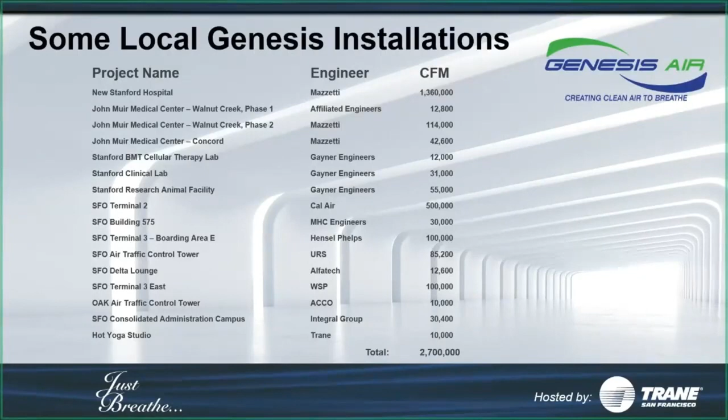First off, you want to be sure that you're not the first one to use a product. This is just a partial list of some local installations in the Bay Area. And as you can see, a lot of them center around hospitals and airports. So you will not be the first if you put them in. There are people you can talk to, and we've had a really good track record in your sales area.

So let's look at the challenge right now. The challenge is in enclosed public spaces or even private homes, medical, schools, offices, retail, your home, government. How are you going to deal with that little creature in the upper right-hand corner called COVID-19? There are some limitations with legacy technologies. Many of you, your challenge is going to be retrofitting existing systems, and CenterPoint PCO is a really easy solution. We'll go over the reasons for that.

But it's hard to use legacy technologies at times because of static pressure drop and particular challenges with the type of contaminant. With a contaminant that's no bigger than 0.06 microns, according to the New England Journal of Medicine, this COVID-19 virion is not very big, 0.06 to 0.14 microns. So filtration, while it's been the answer in the past, may not be the answer in the future. And then you, of course, have the limitations associated with static pressure drop.

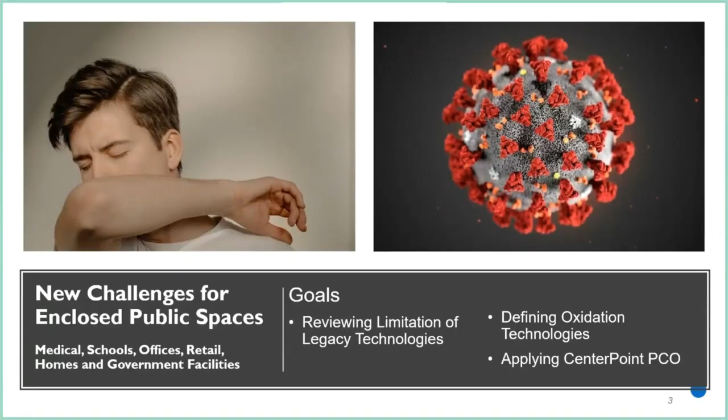So one of the ways that we have tried to overcome some of the challenges is by the use of oxidative technologies. We're going to talk about oxidative technologies today, how they work, and specifically how CenterPoint PCO works. Let's look at the problem itself. This is a short video. It doesn't have sound, but it shows a person sneezing.

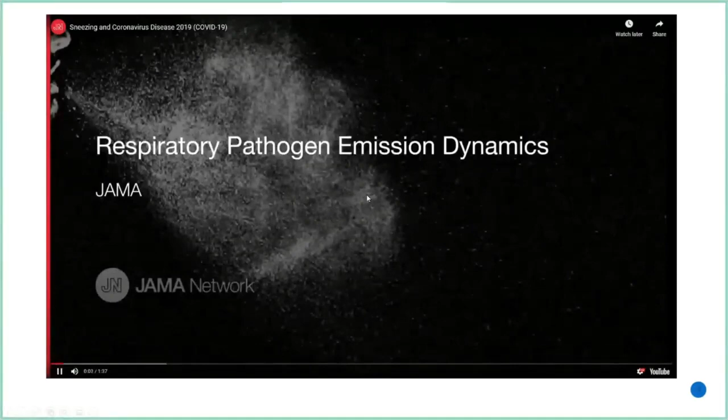And when the person sneezes, we can see a variety of droplet sizes here. The ones that we're most concerned about are not the ones that are falling straight to the surface within 20 inches or the medium range that are falling even further out. The ones we're concerned with are the ones that remain in the form of a cloud. Let's see if I can move this up here. You can see the cloud starting to form of the little bitty droplets.

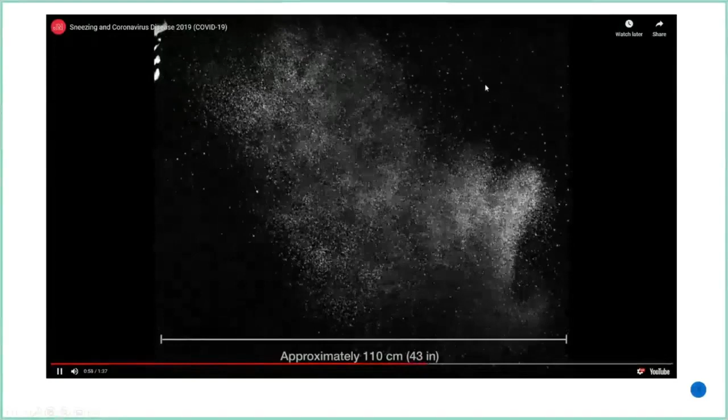That is a droplet nuclei. And as we see that thing form, you can see how it just sits in the air. Droplet nuclei are less than 5 micron, and they can stay in the air for up to 3 hours. One of the things that we need to be aware of is that the droplet nuclei has its own challenge. It can move through your buildings using your air conditioning systems.

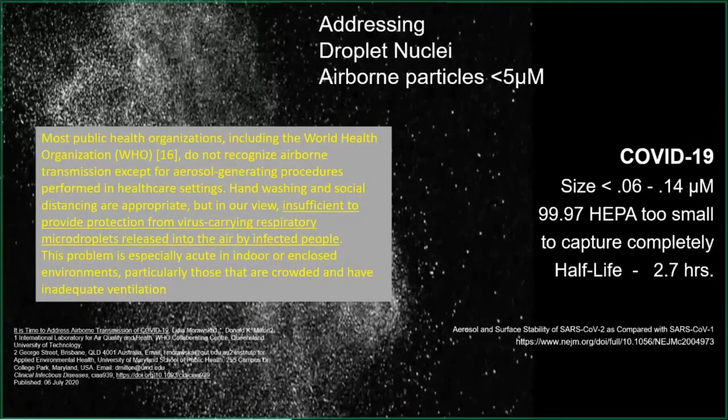It can, of course, move person to person, but we have a challenge now that may not have been fully addressed by the World Health Organization or the CDC. Last week, a paper was published and signed by 239 healthcare and public health officials that said, really, with this particular virus, we do not have sufficient safeguards in place to deal with the airborne component. So what we're talking about today is how you deal with airborne particles, i.e. droplet nuclei, that are less than 5 microns.

Again, we'll review. The size of COVID-19 is 0.06 to 0.14. That's according to the New England Journal of Medicine. Some of this can even go through a medical grade HEPA, but many of you have applications where it's not practical to even put a medical grade HEPA. And the half-life on this particular virus is 2.7 hours in the air.

So if it gets in the air and it can stay in the air in the form of a droplet nuclei, and it can move through your building using your HVAC systems, how are you going to deal with this particular problem when we have a virus where, as far as I've been able to read, we don't even know exactly the minimum infectious dosage? But it's going to be small, because that's typical with viruses. It doesn't take as many as it does bacteria or mold.

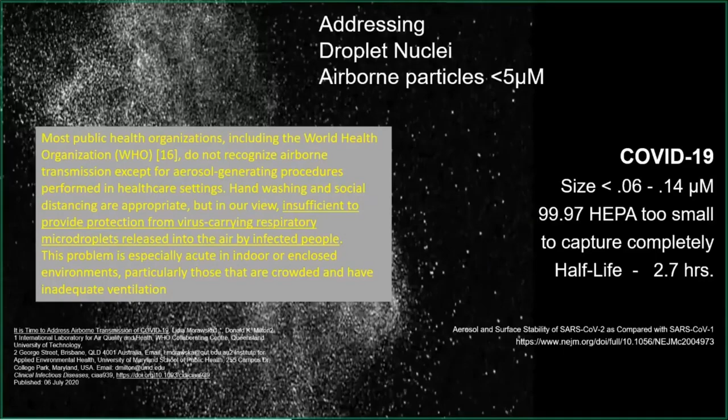So what's our solution? CenterPoint PCO panels are something for you to consider. Photocatalytic oxidation, or PCO, has been on the market for about 20 years, but all designs are not the same. And we're going to look at a couple of different methods of building a PCO. But one of the things to be aware of is in the past, PCO designs led to the production of things like aldehydes, or they put out ozone. There were some real limitations, and they didn't have good first pass efficacy, and that was simply due to the design.

CenterPoint PCO has dealt with some of the issues that in the past were a problem with PCO. Simply by placing the energy inside the panel, it irradiates the complete panel, and using a 6-inch pleated matrix, it gives a lot of surface area for the reaction that must take place. But here are the things about CenterPoint PCO. It's a 6-inch TiO2 coated mesh. It uses a proprietary titanium. The design has been patented because it has really good energy distribution and it has a lot of residence time. So some of the problems in the past have been designed away.

So the products sold by San Francisco Trane, whether it's a retrofit Genesis, or in Trane air handlers, Trane catalytic air cleaners, all take advantage of this unique CenterPoint design. It's been tested. We have third-party tests we'll talk about at the end. Been proven in the field. We've been out in the field now for 18 years. It works. The problem in the past is it was value engineered out of a number of jobs. Some of you may have been involved in jobs that had CenterPoint PCO, but it was value engineered out.

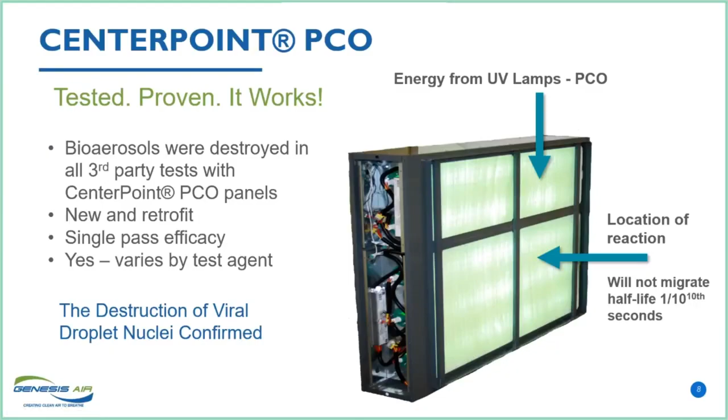So what's the product? It's just a little panel. It looks like a very poorly pleated filter with a light running through the middle, but you can see from the close-up that's not a filter. The reason that it won't pleat is because that fiberglass mesh has enough tensile strength to stand upright in an airstream. And so when you coat it, it doesn't pleat really pretty, but it gives us a lot of area to react with and a lot of area to energize, which makes for very good first pass efficiency for a PCO.

Here's some of the characteristics of a photocatalytic oxidizer. The panel does not capture. As you can see, there are holes in it. It destroys. The reaction occurs only in the panel. It creates a very powerful free radical, which is a whole group of chemicals that are involved in oxidation reduction reaction. The energy that powers this reaction is a germicidal lamp, which means it'll also clean coils if they're shining on them.

It can be used in rooftop units, air handling units, duct mounted, standalone. You can use it. I have one in my house. The largest unit we've ever done is 360,000 CFM. The smallest would be something that was 12 by 12 on a little fan coil unit. But because of the static pressure drop, this is real easy to deploy.

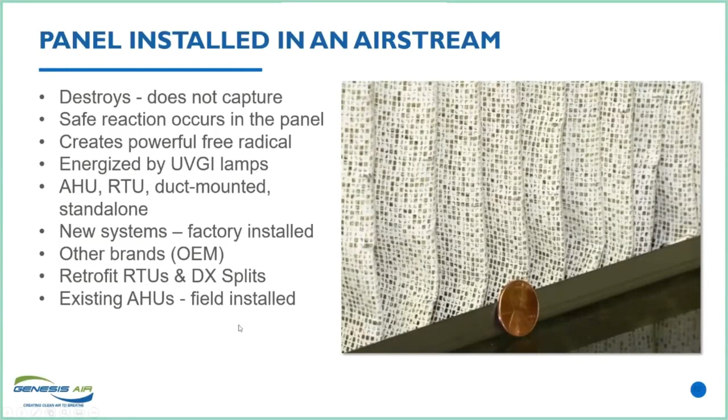But remember, retrofit solutions is what CenterPoint PCO specializes in because it's designed to be easy to retrofit. So you can get it in new systems from Trane, you can get it factory installed, you can retrofit RTUs, DX splits, AHUs, and we also have units that have their own blowers that will just recirculate in the space. Let's look at a couple of examples.

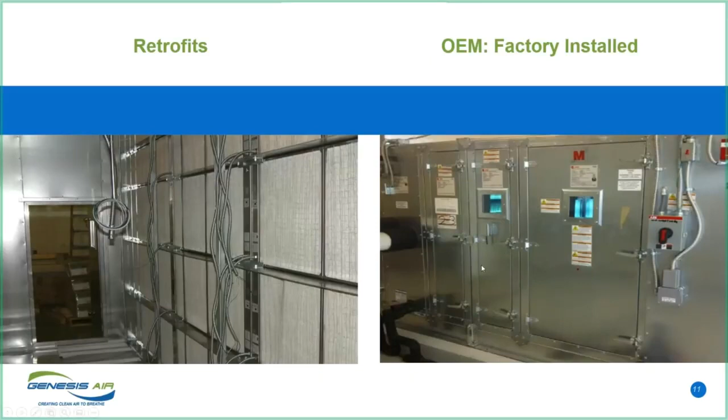This is a factory install. This is a Trane M-Series unit. So you can get this now in their Performance Climate Changers or their Fort Smith product OEM factory. It's a really good option. It's easy to install. The advantage for the product, in particular in a retrofit, is the static pressure drop is 0.05 at 500 feet per minute.

It's really easy to service. You just change out these UV lamps; you can see the little green ends here. You undo a couple of screws, and the lights slide in, and the lights slide out. This is a front-mounted application. This is a side mount where the panels just pull out the side. This one, you take the panels, and on that rack, you pull them towards the servicing person where you expose the service, which is right here. Once again, you can see the lights running completely through the middle of the panel.

So on a front load application, 13 inches, side load application, 6 inches, lower energy requirement. You can lower your outdoor air. We've done a number of jobs using IAQ procedure.

We've been in business long enough to have those actually in-the-field numbers. It's sustainable. The panel itself will last for 15 years of continuous usage. In a school setting, the panels will actually last between 35 and 40 years with normal school use. It's self-cleaning. When the UV lights come on, they keep the panel clean, and they'll also keep coils clean if they're shining on your coil.

Design considerations: we'd prefer to be downstream of your evap coil in your saturated zone so the UV lamps could keep everything on that coil clean on the leaving edge. It does have to have upstream filtration. It's kind of like your evap coil. You don't want to turn our panels into a filter. They're not designed for that. Airspeed is 500 feet per minute or lower. All of our third-party testing was done at 500 feet per minute.

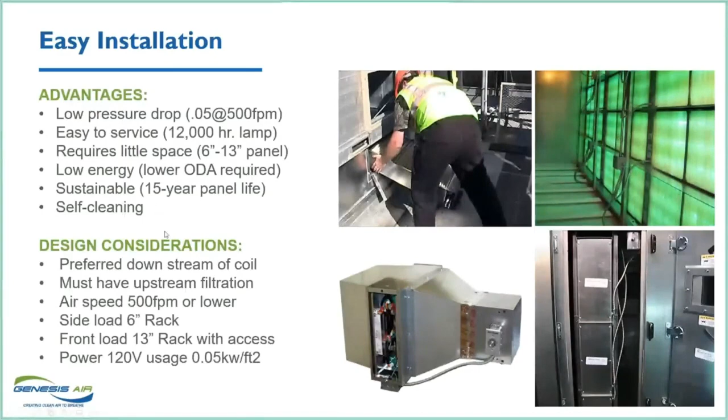All right, how does the panel work? Very simply, it's an oxidation reduction reaction. In a presentation such as today, we won't go into all the chemistry, but suffice it to say it creates a free radical, which is the same kind of thing that ozone or hydrogen peroxide is. There's a whole list of those that we'll look at in a minute. When we create the free radical in the panel, we destroy the DNA and RNA of things like virus, bacteria, and mold spores on the fly.

We break down hydrocarbon chains, odor control. In fact, most of the work that we've done in the Bay Area was odor control to deal with heliports associated with hospitals or emergency generators, or in places like the airport, exhaust fumes off of aircraft. We've also done a hospital or two that were involved with reducing the odors from the forest fires. And that's actually a really good application for the product as well.

But this oxidation reduction reaction is not something new. It occurs naturally everywhere all the time. The sun's shining on some part of the planet all the time, and in the troposphere 7 miles up, the reaction that we have occurring in the panel occurs. OH, or hydroxyl radicals, are created naturally using the UV light from the sun. As you can see by the quote, that's responsible for clearing up carbon monoxide and other carbon-based molecules like methane. So all we're doing is something that's natural.

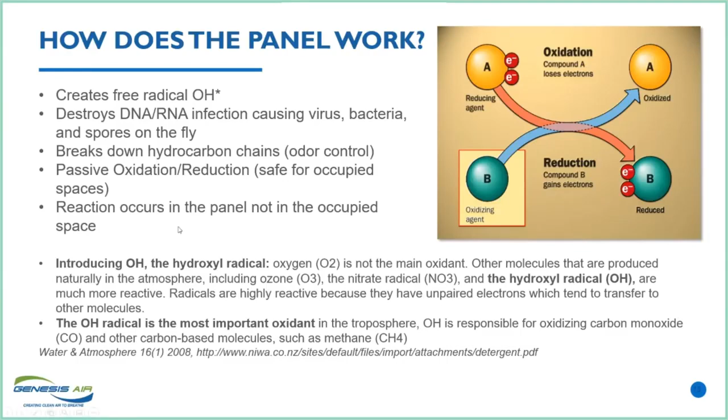What's the benefit? When you turn that power on, for that $1 or 50 cents or whatever you're paying for power at that moment, we're going to break the droplet nuclei down, which gives you a certain measure of safety with an airborne virus that has been shown to pass from one person to another through the air. You also will break down hydrocarbon chains so you can deal with odors in your structure, and you can keep your evap coils clean if you position this panel where it shines on your evap coil. The picture of the hydrogen peroxide bubbling up on a cut gives you an idea of what's happening microscopically in this panel when we create the free radical field.

Our challenge is to deal with the RNA of a virus that's smaller than 5 microns, and actually it's 0.06 to 0.14. Our goal is to break down the RNA or DNA; for this particular virus, it's the RNA. So one of the things we want to do is make sure that we have efficacy with an airborne component. Why an airborne component? Why is that our challenge?

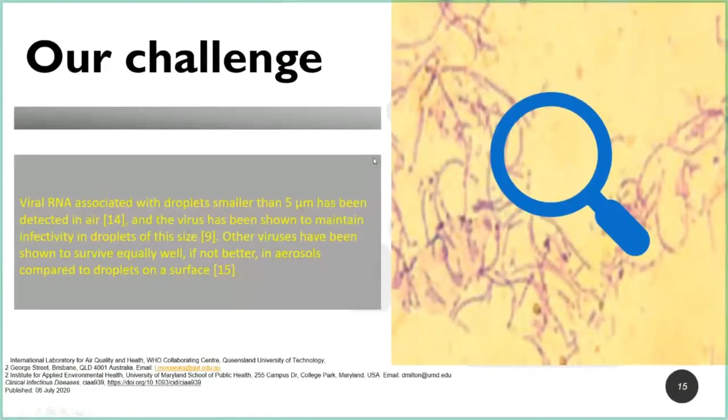Because we're only part of a comprehensive infection control plan. We definitely say you have to follow the CDC or World Health guidelines, do your social distancing, wash your hands, clean your surfaces, do all the things that the public health officials recommend, but there's a hole in their recommendations. They truly don't have a method to deal with droplet nuclei, and that's where we fit in. We fill that gap that's associated with moving air in a space.

Now, the GAP in this particular case, in this slide, means Genesis Air Process, and that's a trademark. But for infection control, remember, there is a gap in the guidelines, and healthcare professionals have gone to the point to have written a peer review article that was released last week, and 239 of them signed it. That says basically we have to start doing something with the air quality inside of our buildings more than we've done in the past. That's where CenterPoint PCO comes in.

On the left, and you can get a copy of the video, Trane has a really cool video that shows the Trane catalytic air cleaner here on the right as it operates and contaminant comes through, so you can get an idea of how it works in an HVAC system.

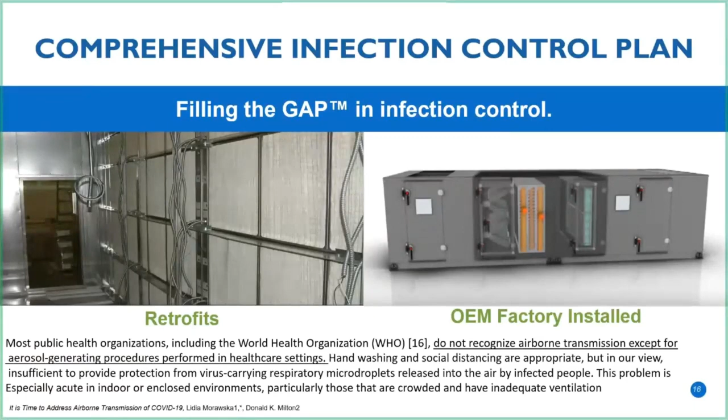Let's redefine just briefly our challenge. It's these droplet nuclei that are less than 5 microns that will migrate more than 10 meters and can stay in the air for up to 3 hours. And they can stay alive, according to National Institute of Health, for up to 2.7 hours. There's also an ASHRAE position paper on infectious diseases. It's been renewed through 2020, I think August of this year.

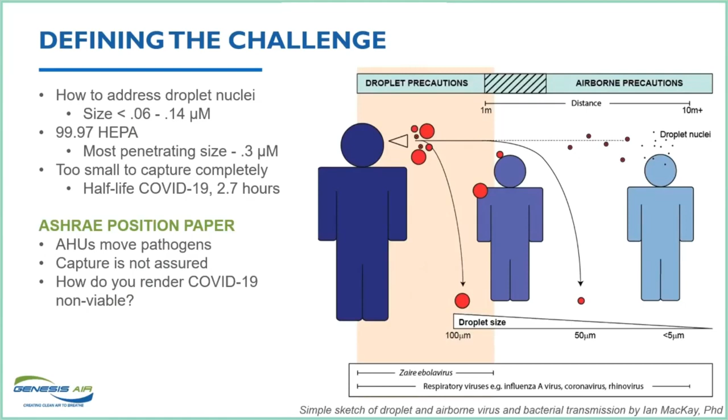So if capture is not assured, and you've got AHUs moving pathogens, how are you going to render the space a little bit safer from the challenge of COVID-19? I think we're offering up a way that you can do that. There are a number of free radical creating technologies in the market. All of you as owners or engineers have been bombarded by people like myself who are vendors offering you technologies that are not legacy technologies. In other words, they don't capture. They use oxidizing agents to destroy.

I think there are 3 main categories that we should look at. Catalytic converters on your car are an example of a free radical creating technology that everyone's familiar with. The market is full of ionizers, and those ionizers also create free radicals. And then finally, there are things like photocatalyst, and in our instance, it's a CenterPoint photocatalyst.

All of these technologies, what they have in common is they generate free radicals, and they use an oxidation reduction reaction to break down the contaminants in the air, whether it's RNA or it's hydrocarbon chains. Either way, it's an oxidation reduction reaction, and all of the agents that do that reaction fall under the heading of free radicals. So how are the products different? They all create free radicals. Well, they can have a different energy source, the catalytic converter, the ionizer, or the PCO. The location of the reaction can be different, and the type of free radical created can be different.

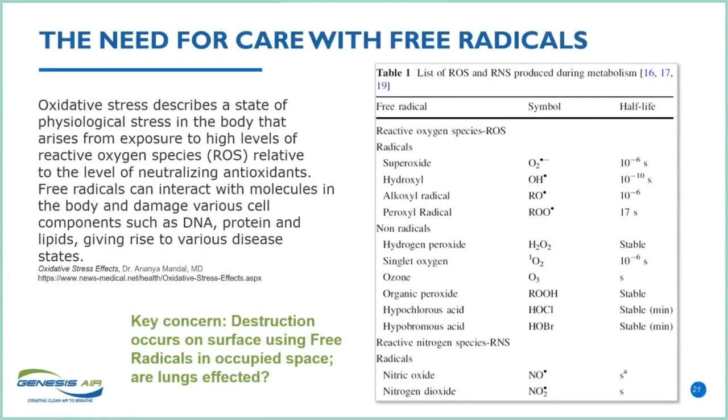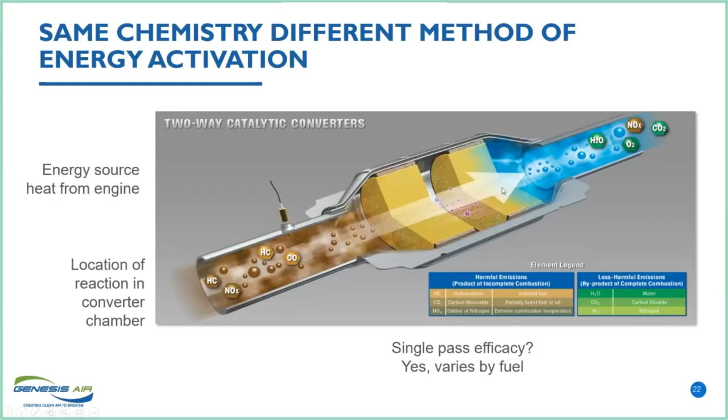This is a thermal oxidizer. Where does the free radical get created? Where does the reaction occur? Right there in those little half sections inside the panel itself. Does it have single pass efficacy? Yes, the EPA insists that all these things be monitored, and they have to have a minimum removal capacity in a single pass. So what are we looking at next?

We're not going to put a catalytic converter in our office. We might put an ionizer. Ionizers will work, but a word of warning. In the new 2019 ASHRAE handbook, be aware in hospital applications in particular, ionizers or chemical fogging and mist are not recommended in occupied spaces.

If it's an occupied space, anything that creates a free radical, you want to be careful where you're having that created, because free radicals cannot differentiate between a virus and a cell in your lung. If the reaction is taking place, it's taking place. Single pass efficacy, you can see this is an uncontrolled environment and the reaction can occur anywhere in the space. So it has very little single pass efficacy.

The location of the reaction can be anywhere in the space, but we do know that the ionizer is providing the fuel that starts the fire. Remember, the heat off the engine in the catalytic converter was the fuel that starts the fire.

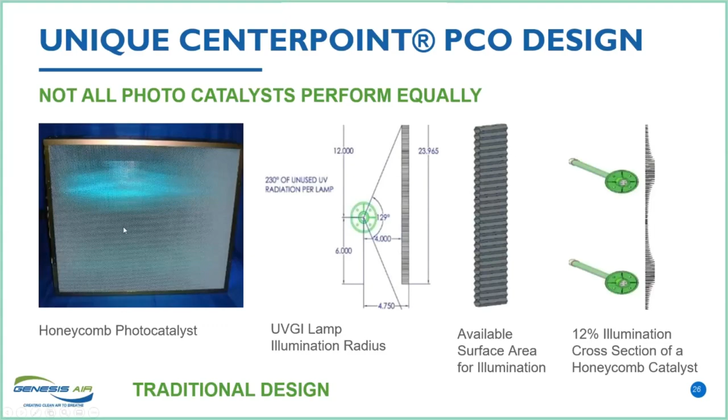That does not happen in CenterPoint, because with CenterPoint, the energy is embedded in the lamp and it irradiates from the inside out, not the outside onto it.

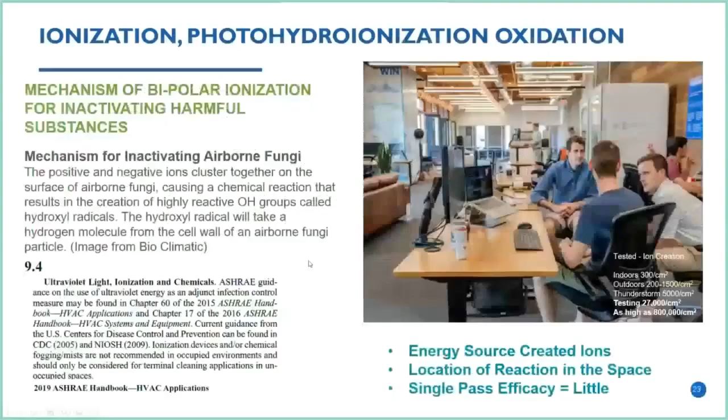All right, so let's go to our concluding statements. CenterPoint PCO, we have even energy distribution. The lights, the photons from those lamps provide the energy that does the reaction. Static pressure drop 0.05 at 500 feet per minute. 6-inch width, can be front loaded, side loaded, can be in new units, can be retrofit, has a measurable single

pass efficacy, and it's going to vary by the agents, but the reaction location is always going to be in the panel because that reaction occurs in less than a billionth of a second, so it won't migrate out into the space. And the media itself is pleated the way it is, so at 500 feet per minute, the effective number of feet per minute across the panel is less than 70. So we've got good residence time, even energy, and occupant safety.

Has it been tested? We're going to close with this. Yes, the panels have definitely been tested by the Department of Defense at Dugway, Utah, by Iowa State University, and by the way, Dugway was testing to see if we could sanitize the air, so we got like a 98% removal. Iowa State wanted to see if we could sterilize. So if you slowed the airspeed down, a virus they tested, we can actually sterilize the air, so that's a design feature. Research Triangle Institute did the same testing that Dugway did as a confirming test.

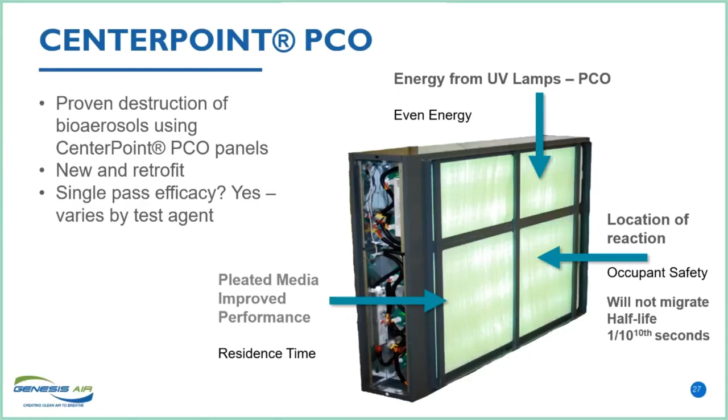This has come up a couple times. We have UV lights in the product, but we're not a UVGI system. Just real quickly, what's the difference between PCO and UVGI? The media. The lights we have would be more powerful than the ones you would buy to keep your coils clean, but they're also germicidal, so they're doing exactly the same thing. But we're also taking advantage of the energy off that photon to activate what looks like white paint on that pleated matrix. That white color is titanium dioxide, and when it gets energized, it creates those free radicals.